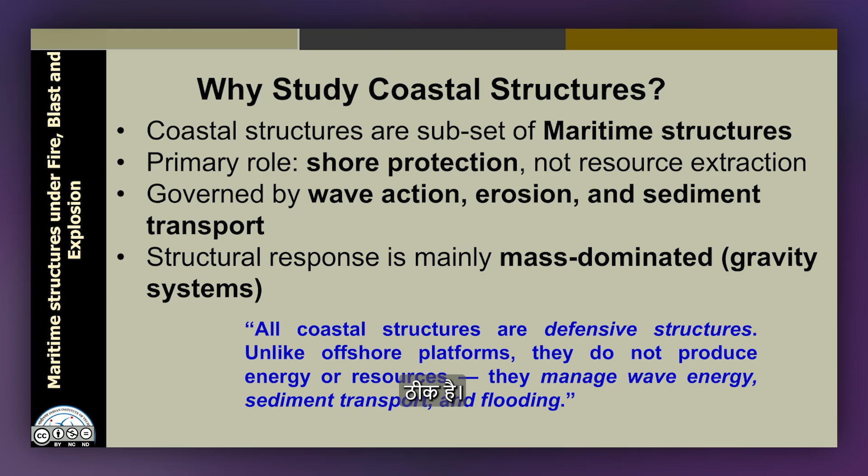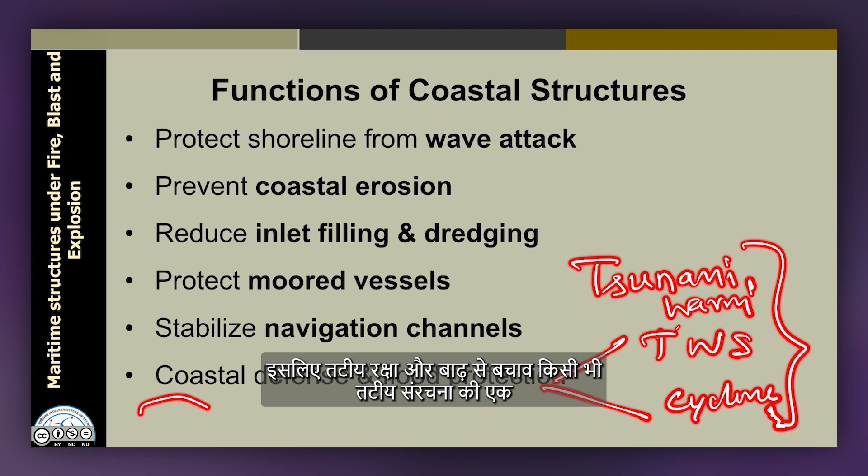Prediction of cyclones and other natural disasters are all part of coastal protection, because the most vulnerable area under these kinds of natural disasters is the coastline and people living along the coastal sector, the fishermen community, etc. So it becomes very important for a country to protect its citizens living along the coastline against these natural disasters. Coastal defense and flood protection becomes a very important and vital requirement of any coastal structure, which is of course controlled, governed and constituted by the Indian Coast Guards.

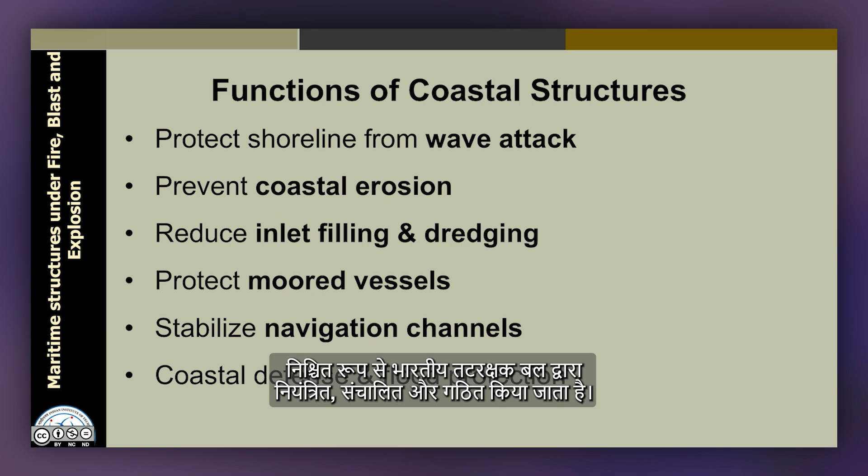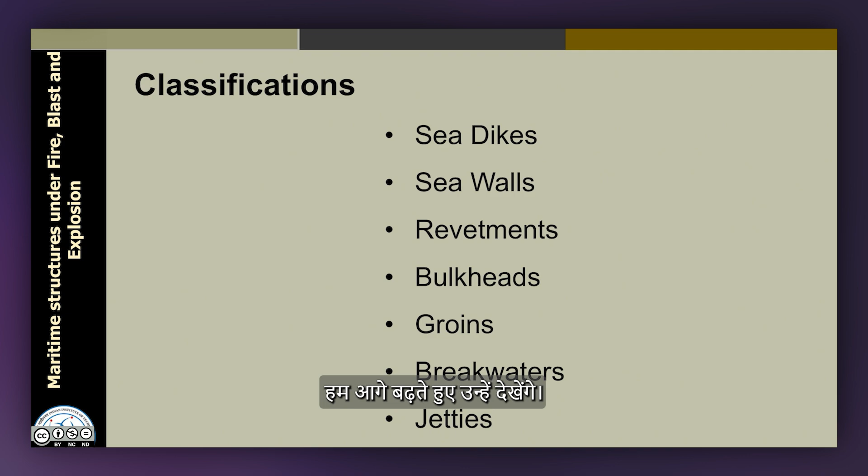Let us now look at the classifications of coastal structures: sea dikes, sea walls, revetments, bulkheads, groins, breakwaters, and jetties. These are the major classifications. There are sub-classifications within them which we will see as we go forward, but these are the major seven.

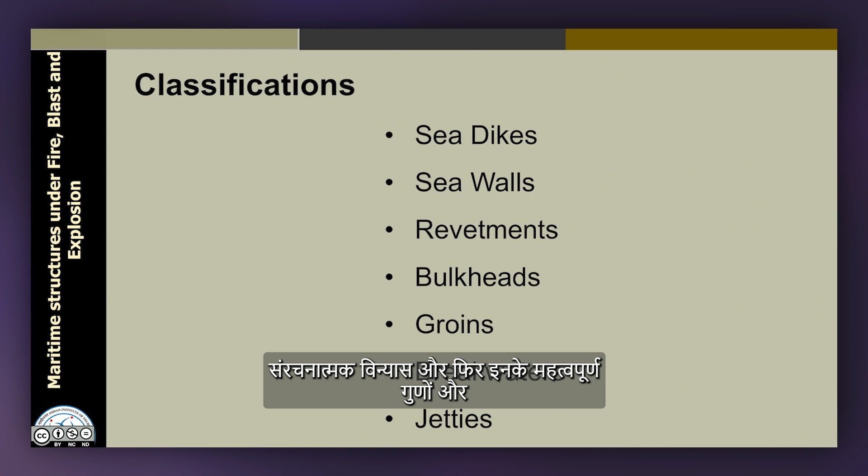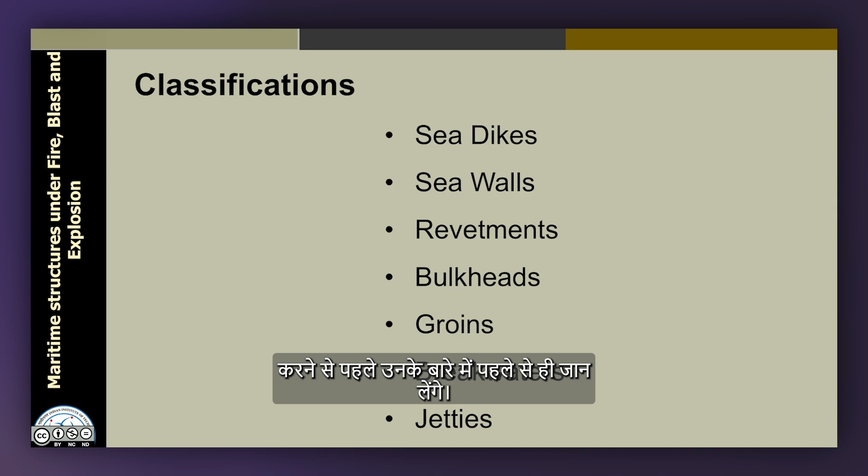Let us see one by one in detail to understand the structural geometry, material used for construction, the shape and size and cross section of the members, the structural configuration, and the merits and demerits of these, before we start designing them under fire, explosion and blast loads. Let us talk about sea dikes.

These sea dikes are very long, continuous coastal defense structures. A sea dike does not fight waves aggressively, it survives them passively. They do not protect the coast by fighting the waves; instead they act as a passive protection system. The typical geometry of a sea dike is a trapezoidal cross section.

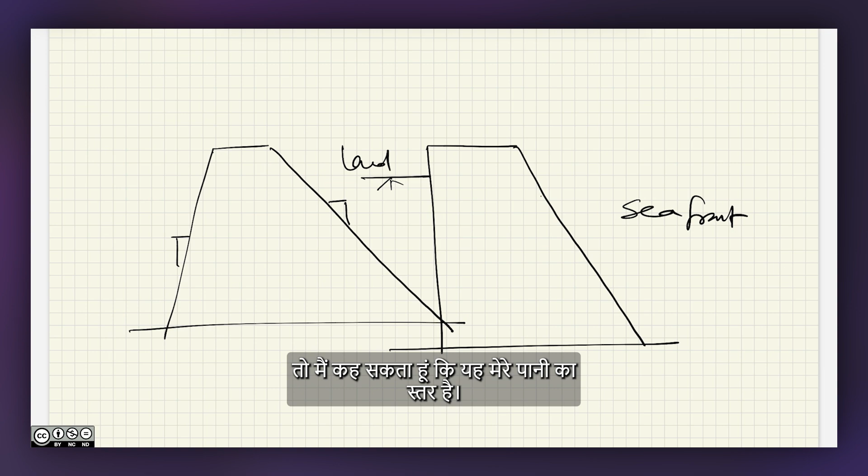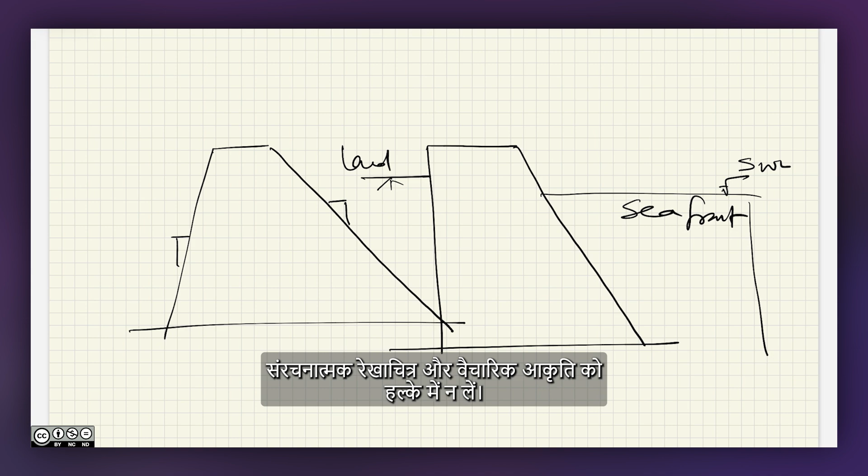So this is the water level, and there are minor details like weeping holes, toe and foot reinforcement, to make this structural system more stable against lateral loads. This is a conceptual figure, not a structural drawing. We call this a long continuous structure used for coastal protection against high waves.

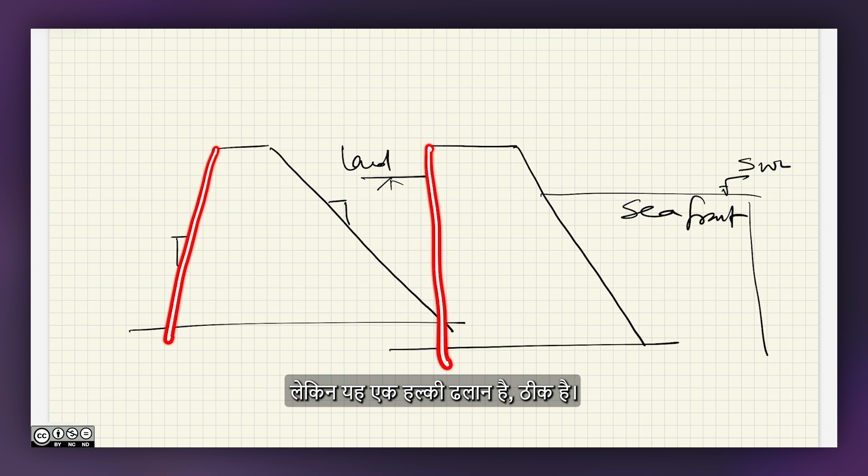So it has a trapezoidal cross section and is a massive gravity structure that rests on the seabed by its weight. The seaward slope is about 1 in 10 and the landward slope is 1 in 3 - the seaward slope is more gentle, and the landward slope is more steep, sometimes even vertical.

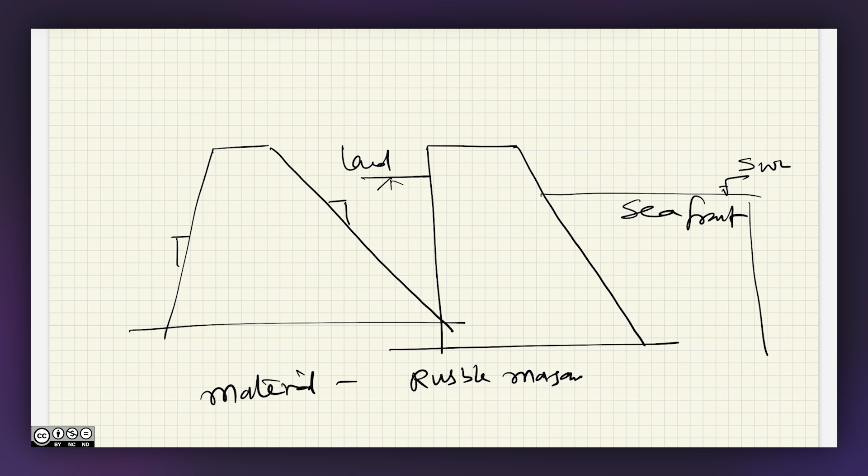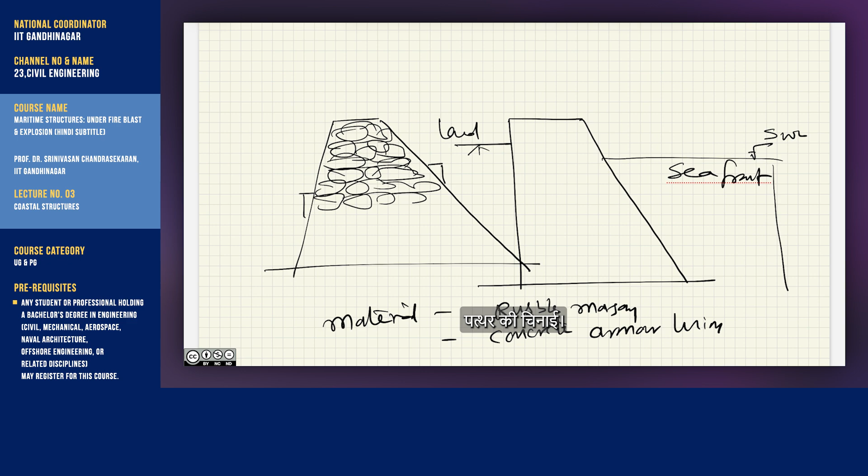So trapezoidal cross section, different slopes on either side, massive gravity structure. The moment I say gravity structure, you can believe the material used for construction is usually rubble masonry or stone masonry, sometimes with a concrete armor lining.

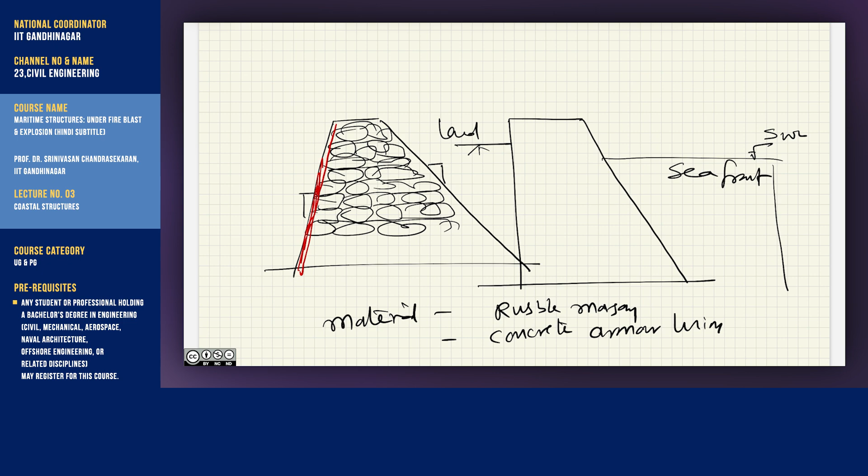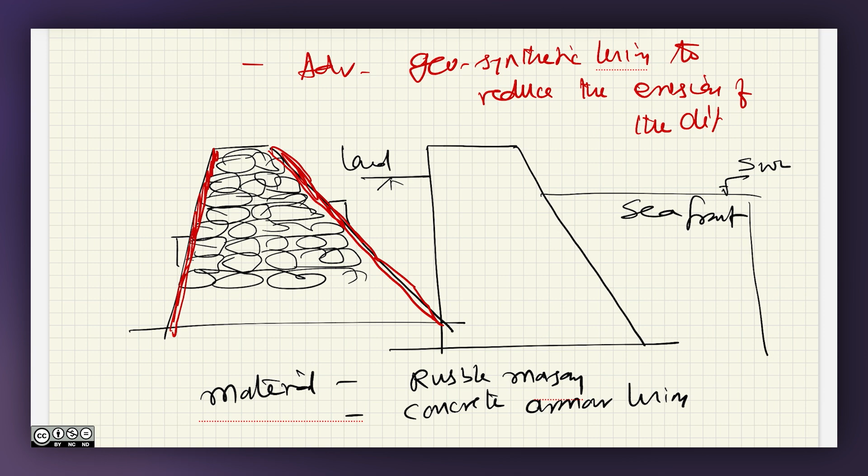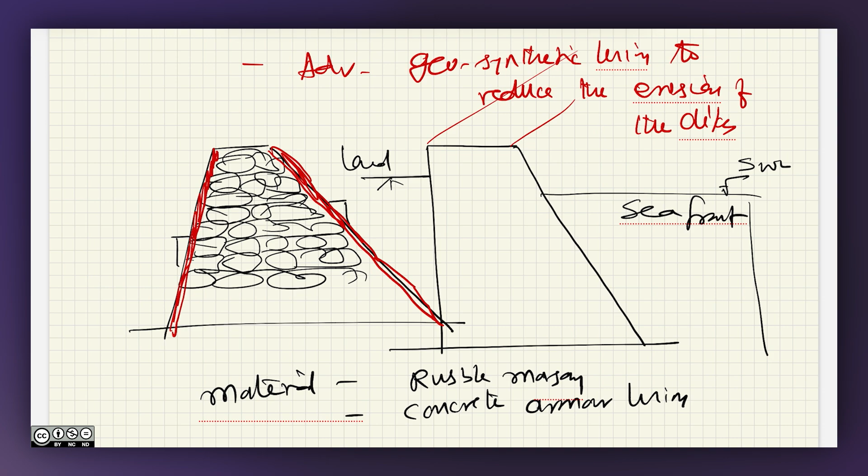The most advanced systems have geosynthetic liners to reduce the erosion content of the dikes. And on top, they often have a lot of vegetation to make it attractive, as well as to help reduce erosion on the top of these dikes.

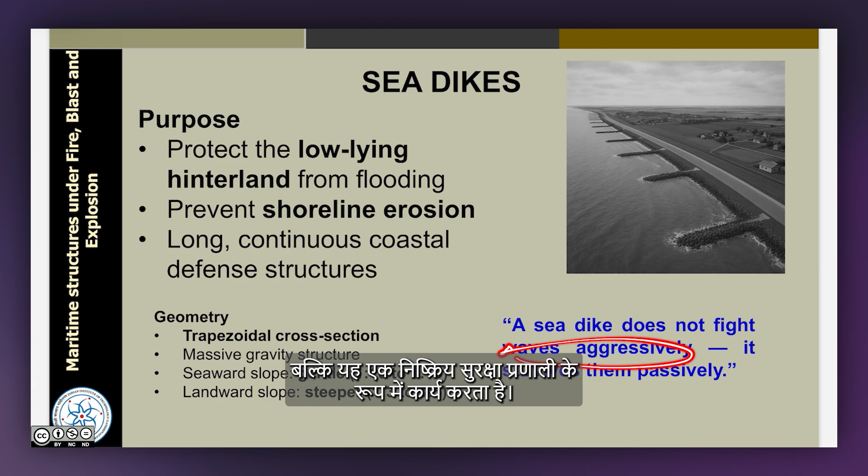So a trapezoidal cross section, different slopes on seaward and landward sides, massive gravity system - sea dike is a coastal protection system for defense purposes. It is not built to control waves aggressively, but acts as a passive protection system. A typical sea dike looks like this.

The material used is sand, silt, and clay. It has a protective layer of rubble masonry and boulders, asphalt and concrete slabs, and vegetation cover on top to reduce soil erosion. It also has filter layers to control seepage. Sea dikes are geotechnical structures, not pure structural systems.

Let us look at the structural action of a sea dike. It has very low permeability and water tightness. Wave energy acting on the sea dike is reduced by its gentle slope, and it has a huge mass. It fails in different modes: one is slope erosion, another is piping, and crest overtopping.

For example, if the sea waves increase, the dike can even be overtopped, which can cause failure. That is one way of failure.

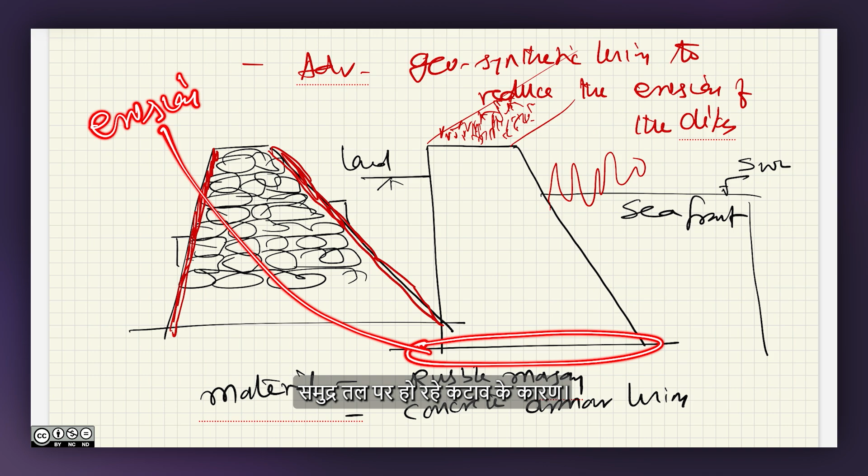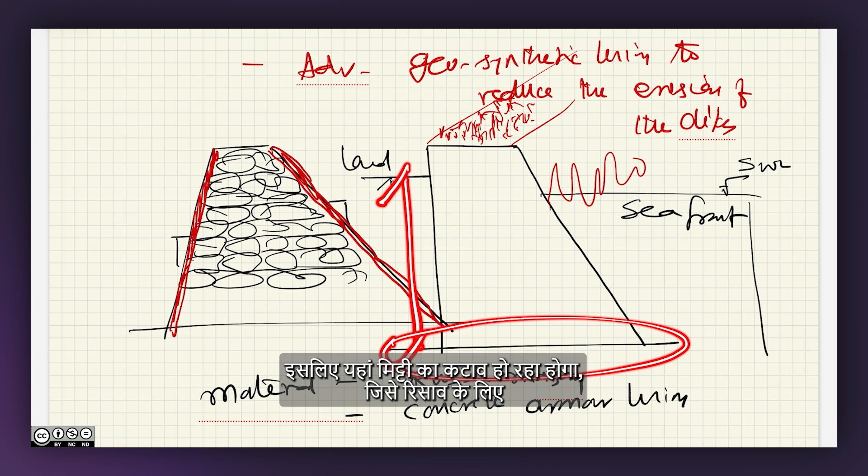A second failure mode can occur due to erosion happening at the seabed, since these are installed at shallow waters with depths of about 15-20 meters. Soil erosion can happen here, which needs to be protected by providing seepage holes and weep holes so water drains off and erosion does not take place.

If erosion takes place, it can also cause failure by differential settlement, which then induces cracks on the sea dikes.

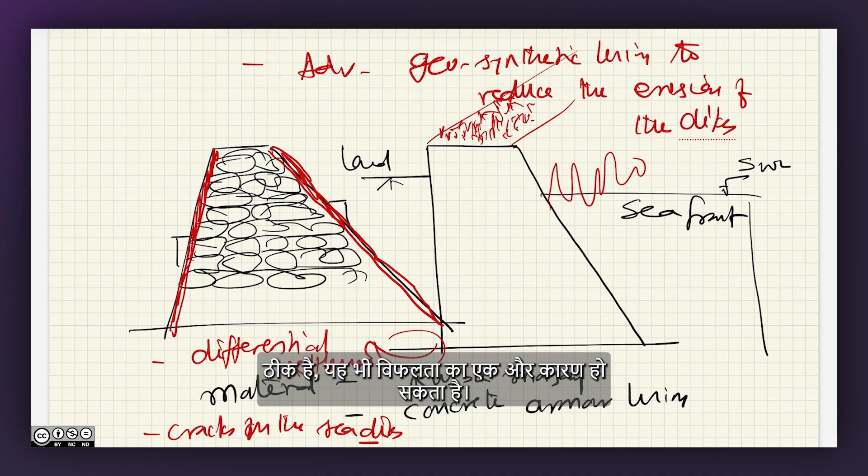That can be another mode of failure. So, the modes of failure could be slope erosion and crest overtopping. Let us ask a question: when is a sea dike not to be constructed?

As maritime engineers, tomorrow you will be advising coastal protection systems for the government and so on. Therefore, one should have an idea about where they are suitable, or a counter question, where they are not ideal.

Whenever you have very high initial cost involved, sea dikes are not ideal. They have visual impact and severe environmental impacts on the coast side, because they create a very rigid system which can affect the visual appearance of the coastline. Coastlines are becoming an important sector for tourism attraction, so if you have a sea dike, people feel this is a place of overtopping or flooding, and it will not attract tourism.

Tourism wants a very gentle, land-based beach surface, smooth and mixed with water. Natural beaches in Hawaii, Thailand, etc., look like the beach mixes fluently with the water body. Capri Island in Italy has natural, scenic beauty that attracts many foreigners and tourists. When you construct a sea dike, a rigid mass system along the coastline for a longer length, it has a very serious visual impact.

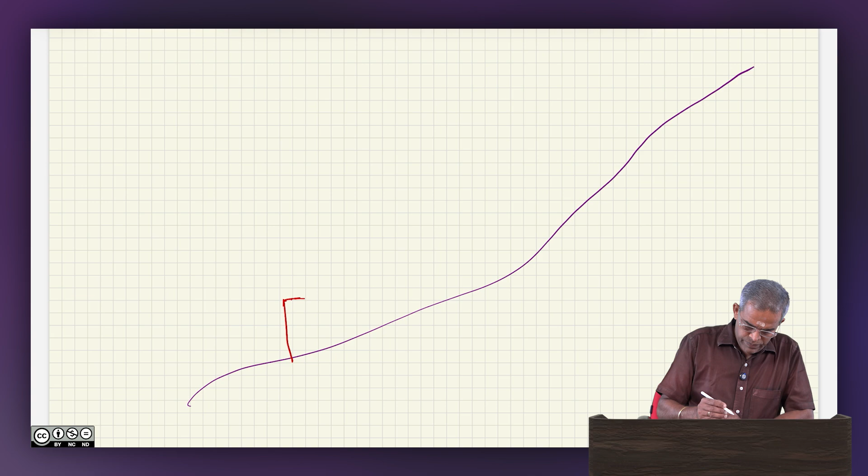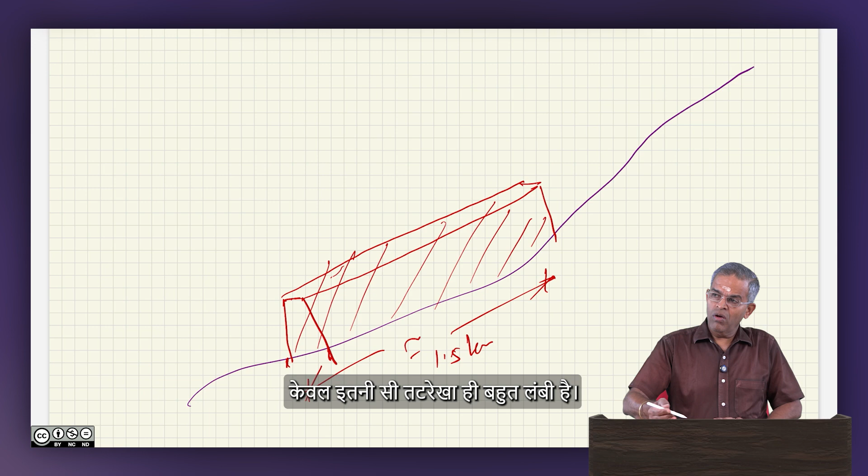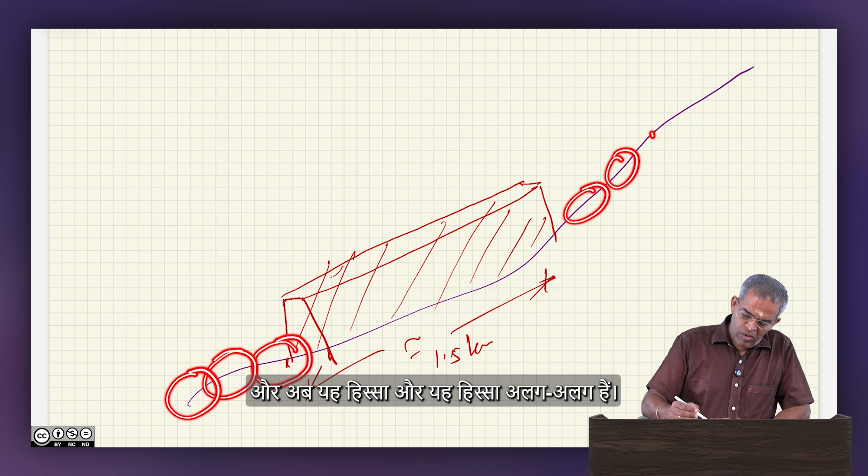Let us say we have a coastline and you construct sea dikes here, founded for a certain length only, maybe about 1.5 kilometers, because it is a very expensive system. The coastline is very long and continuous, so now the erosion at this part and this part becomes different, and there will be sediment transport happening between these two sectors.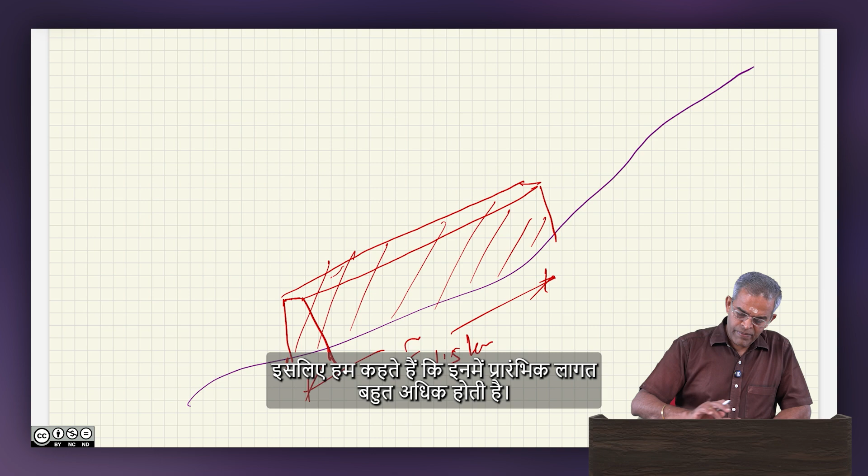So, if you construct a sea dike at this region, the rest of the coastline will be seriously affected—that is the trouble. Effectively you must construct a sea dike for the entire length of the coast, which is highly uneconomical. They involve a lot of initial cost, create very severe visual impact, require continuous maintenance, and most importantly, they cut off access to the coast, because being a rigid system, it obstructs the land or beach from the sea.

So, it cuts off the access. Sea dikes protect land, but at the cost of losing the coast. You lose the coastal scenic beauty when you construct a sea dike. Of course, it protects the land, no doubt about it. So, they are constructed judiciously, only when really required.

They are not casual systems to be constructed wherever and whenever you want, just because you want to invest in coastal protection. But if you have a nuclear reactor on the coastal side, or some important research laboratory there, you need to protect them—for that sector, you construct a sea dike.

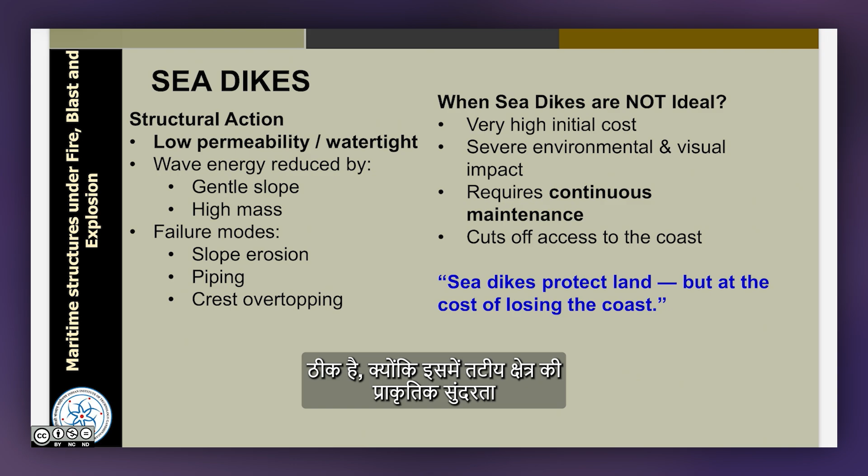For example, in Japan, the nuclear reactor located along the coast has a sea dike as a protection structure. In Kudankulam, Tamil Nadu, a proposal is also coming up to construct a sea dike to protect such structural systems. So, sea dikes are very strong, massive, rigid protection systems constructed on the coastline for a specific purpose, because of their visual impact and issues related to the scenic beauty of the coast. It is not a very common system to be constructed.

The next one is the sea wall. It is more or less similar to sea dikes—you can see a sea wall. It is a rigid wall with a tapered cross section, and it protects the coastline from even very high tides, and partly people also propose constructing sea walls for tsunami protection. Sea walls are massive structures.

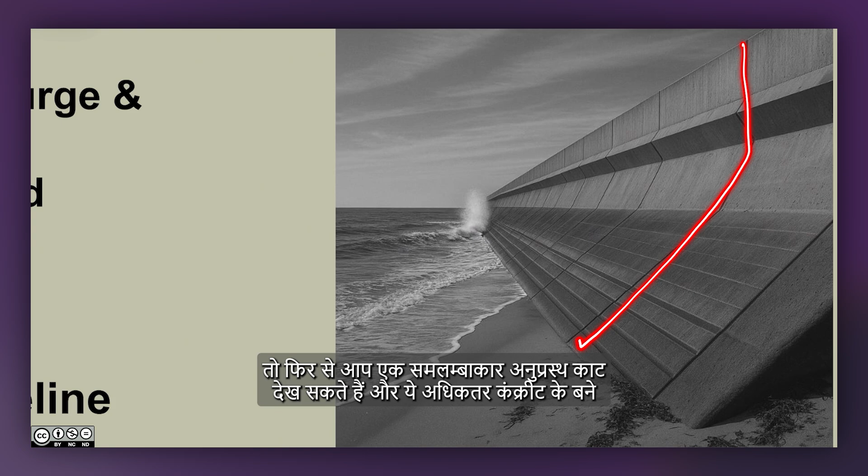So, we can now look at the structural system—again a trapezoidal cross section, and mostly they are made of concrete, because rubble masonry cannot have an integrated structural system like this. So, they are mostly of concrete or prefabricated interlocking blocks, essentially concrete interlocking blocks, otherwise called armored blocks.

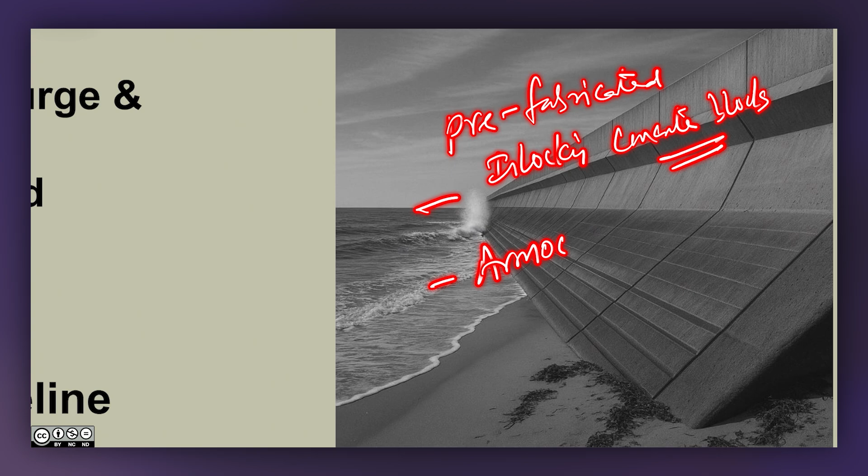Sea walls are generally constructed to prevent flooding due to storm surge and waves. There are sectors on the coastline where flooding and coastal erosion very often take place. For example, in Odisha coast we have this trouble, with a lot of coastal erosion happening. Similarly, in Kerala coast we have this trouble of coastal erosion. These places of severe coastal erosion are identified using coastal vulnerability mapping, and this length of coast is chosen where no other alternative can work. Sea walls are recommended there. They are very expensive systems, friends, they are very expensive.

If you look at the Thailand coastline, near the scenic beauty of Sriracha campus or Sriracha land and so on, you have got white sand beach in Thailand, where some sectors of this coastline are protected by sea walls, because you have the Thai oil company whose plant is located on the coastline. So to protect the refinery unit of Thai oil, people have constructed sea walls for not a longer length, just a small length. They are essentially constructed to prevent flooding.

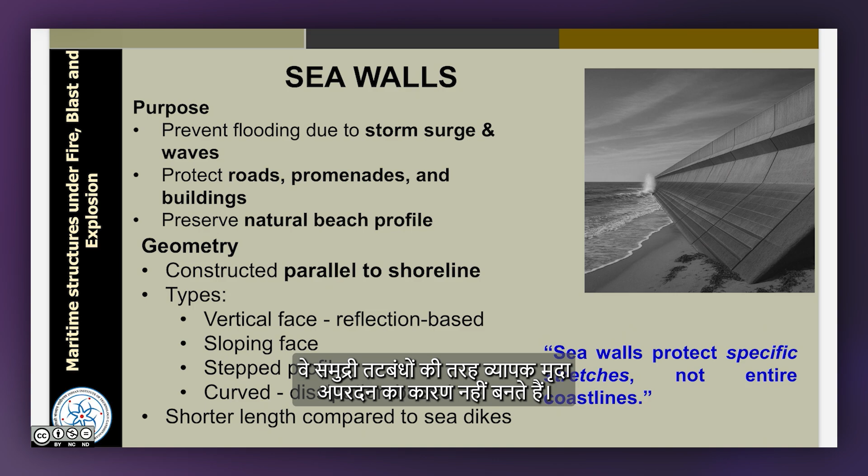It is a coastal protection system. It protects the roads, promenades and buildings built along the coastline for a certain length, while they also preserve the natural beach profile. They do not cause extensive soil erosion like sea dikes. Sea walls also help us protect and preserve the natural beach profile.

They are generally constructed parallel to the shoreline. There are different types of sea walls you can construct: a vertical face, which is called a reflection-based sea wall, a sloping face, stepped profile, and a curved profile, depending upon the architectural aesthetics required along the coastline. Sea walls protect specific stretches, not the entire coastline. They are constructed only for a short stretch, because they are a very expensive system.

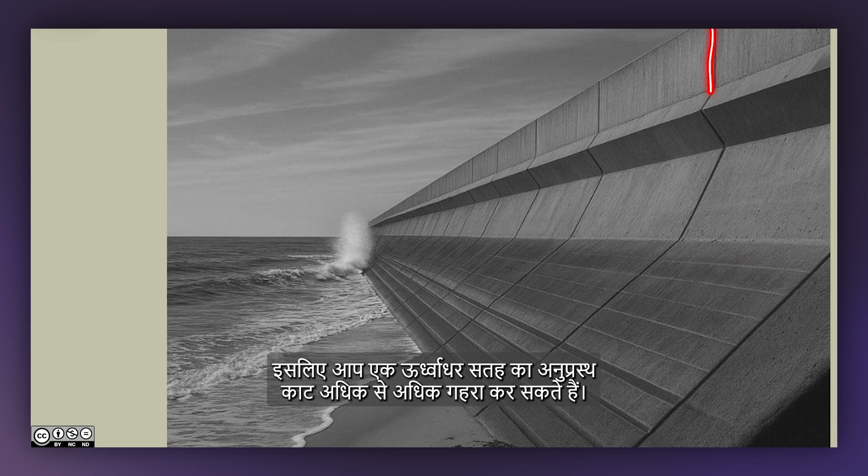Rubble masonry is used, whereas the outer line is constructed with concrete. You can also have mass concrete vertical walls or asphalt concrete surfacing walls for improved visibility. The one shown here is an asphalt concrete surfacing wall with a lot of weep holes. Water is allowed to pass through them and drain off the other side. So you can have a vertical surface, or a tapered cross section, like this section here.

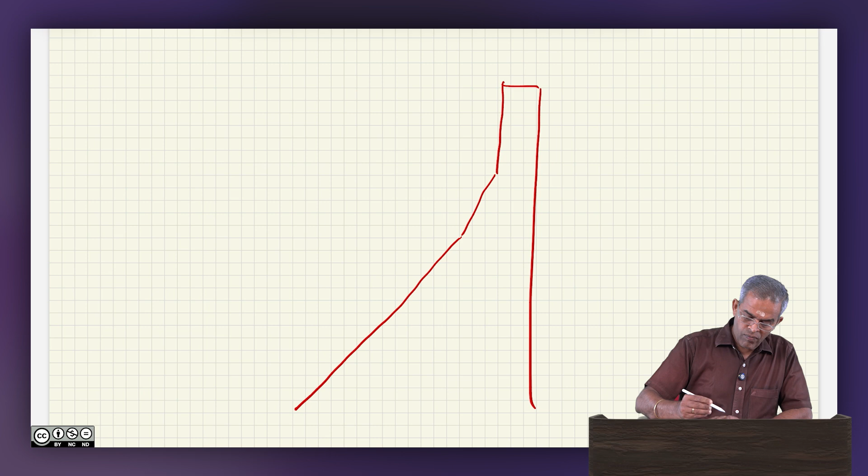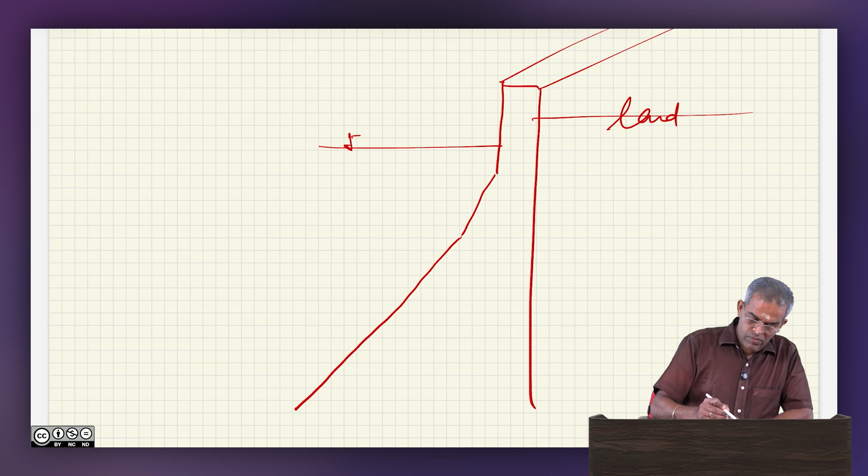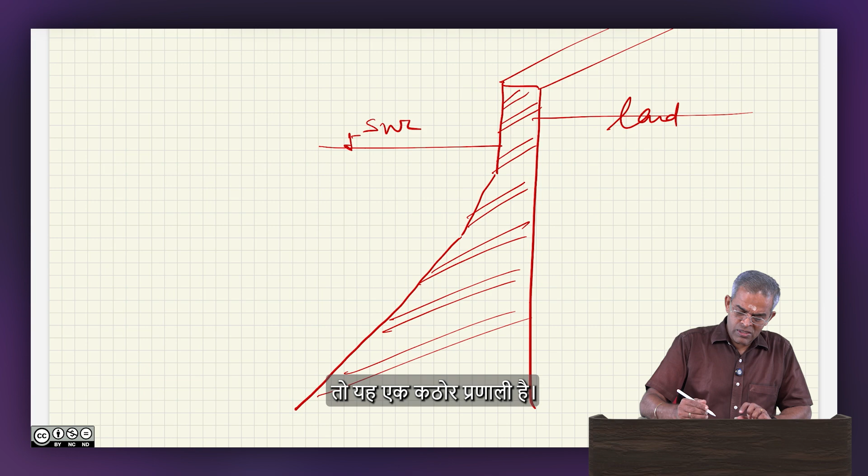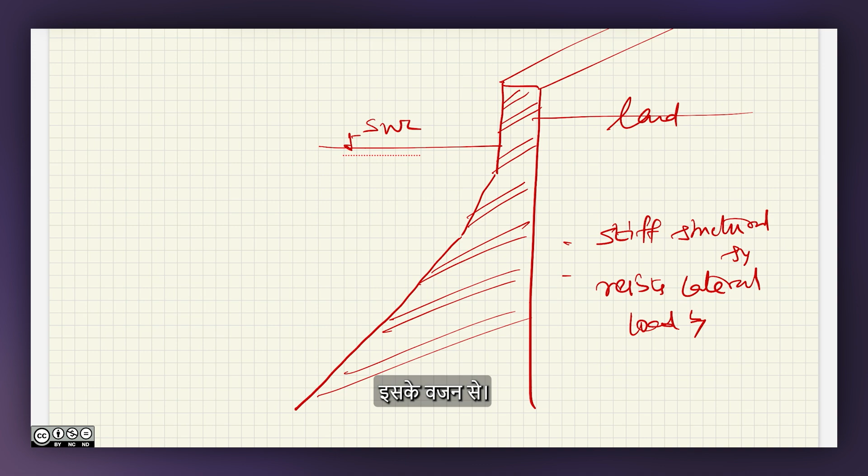So this is the land side, and this is the sea wall. You can have a vertical surface for a shorter length, and this is a cross section. It can be masonry, armored concrete, armored blocks, or concrete solid walls. This is a stiff system. It resists lateral loads by its weight and stiffness, so it is a rigid system.

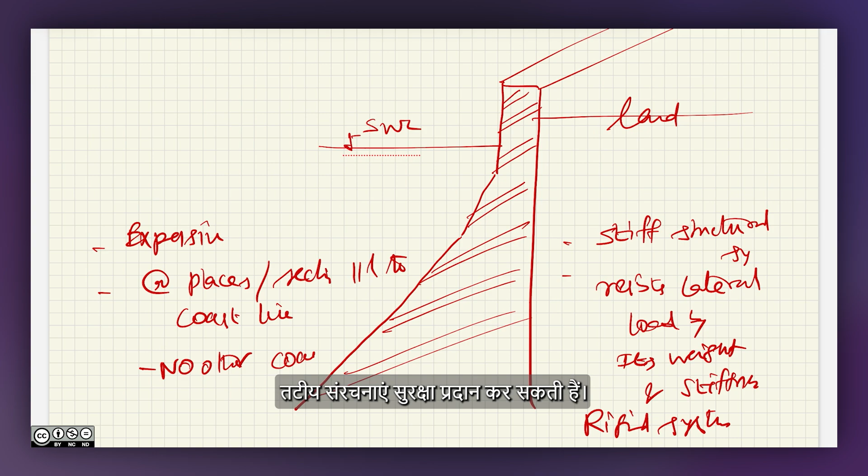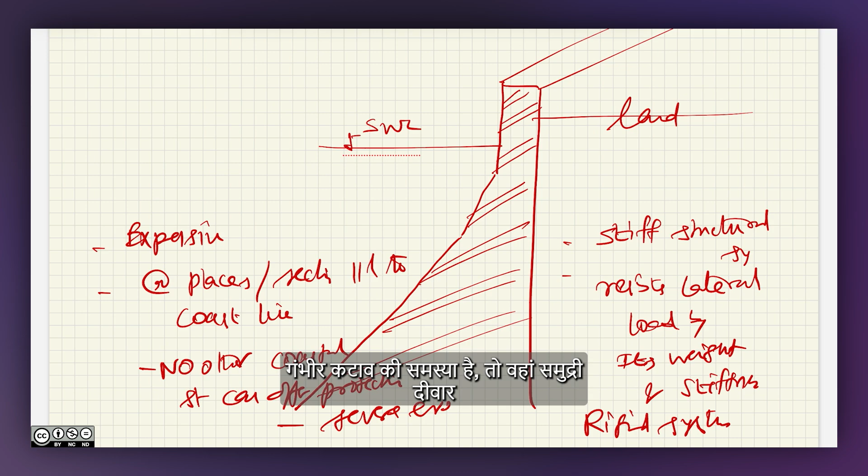They are very expensive, so they are only constructed at places or sections parallel to the coastline where no other coastal structure can offer protection. For example, if you find a coastal line which has a severe erosion problem, then one can go for sea wall type construction.

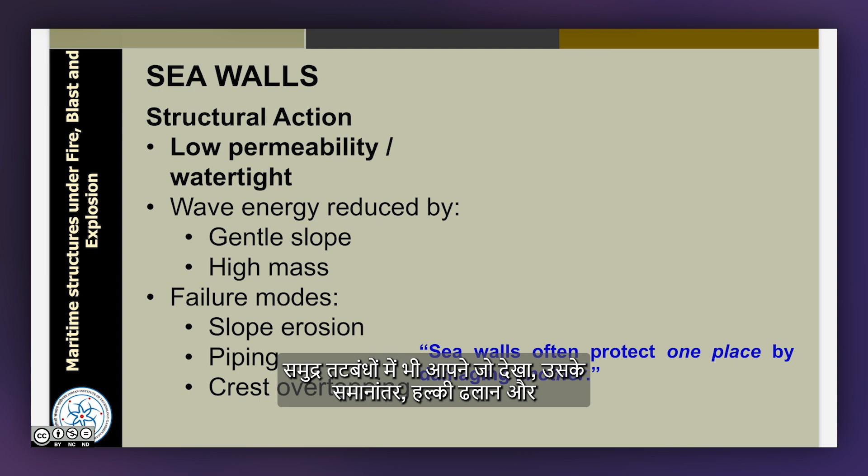The structural action of sea walls shows low permeability and water tightness. They have wave energy reduction taking place because of the gentle slope and high mass, parallel to what we saw in sea dikes. The failure modes are the same as those of sea dikes. Sea walls often protect one place by damaging the rest — they protect one spot where they are constructed, but the rest is severely damaged.

The construction type can be sloping front or vertical front, and the stability of the wall depends on toe protection. There are many examples where sea walls have failed, one classical example being the failure of the Kamaishi sea wall in the 2011 tsunami in Japan. Sea walls also have typical hydrological problems: they increase the mean water level at that sector and increase wave heights, as per the report provided by IPCC in 1997.

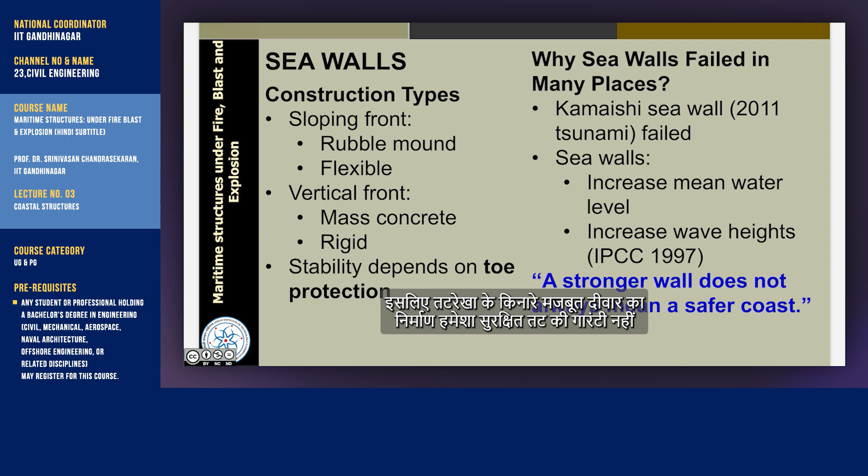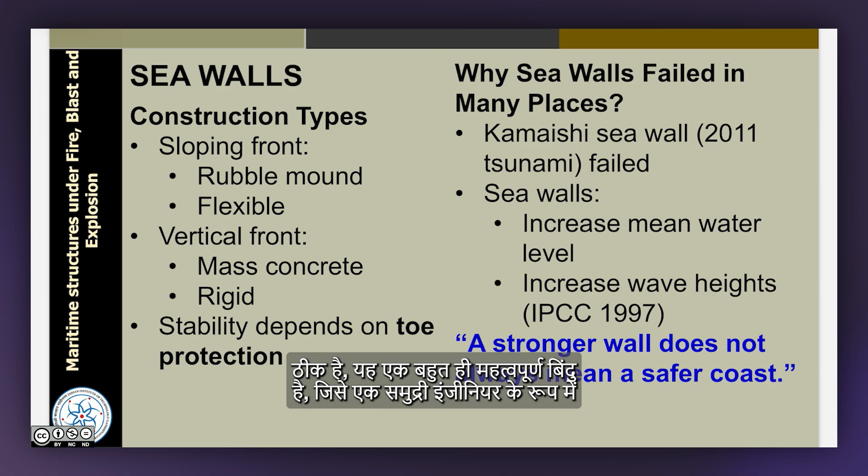So a stronger wall constructed along the coastline does not always mean a safer coast. A stronger wall for that segment will protect the coastline there, but the rest of the coastline may get affected very severely. That is a very important point which, as a maritime engineer, we must register in our mind.

Let us see the different failure mechanisms by which sea walls and sea dikes, which are rigid structures, can fail. One is overtopping and scouring, one of the most common causes of failure. When water waves higher than the wall flow over it, they create a high speed water jet on the landward side. This current scours and erodes the soil at the base, causing the wall to destabilize, and the wall will overtop or collapse.

It can also fail by hydrostatic pressure. When the water level rises gradually, it causes flooding by building high hydrostatic pressure at the heel. When this exceeds the structural limits of the design, it fails.

The third one can be settlement. As I said, erosion will cause settlement of structures, so subsidence or settlement can also cause sea walls to fail. Under massive earthquakes of 9.0 magnitude and above, such as occurred in Japan in 2011 during the tsunami, ground level subsides by about 1 meter. This lowers the protective height of the wall, causing functional failure. When the wall gets lower, the wave overtops it and the wall itself is completely washed away by the sea waves — that happened actually in the 2011 tsunami in Japan.

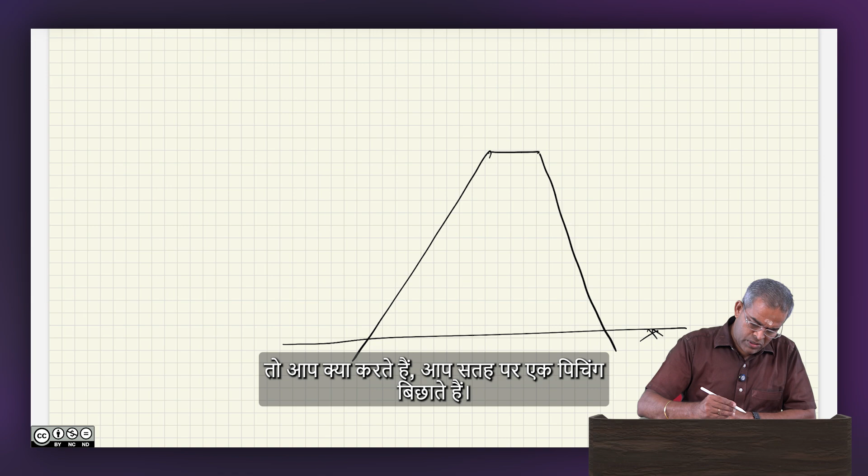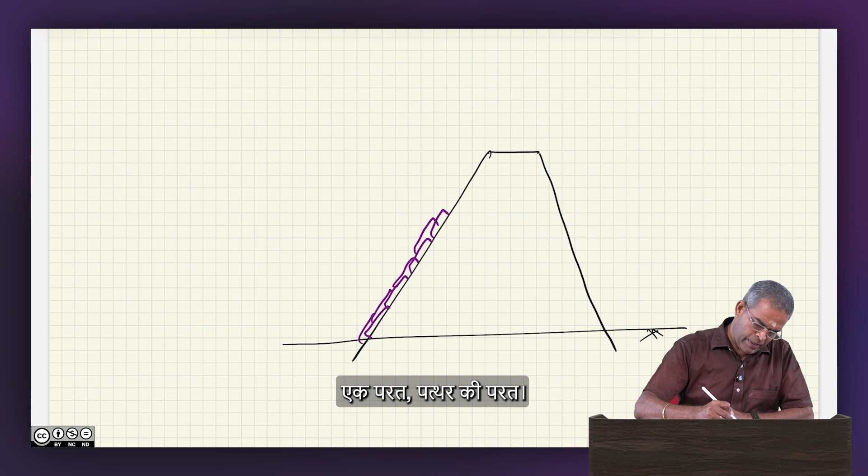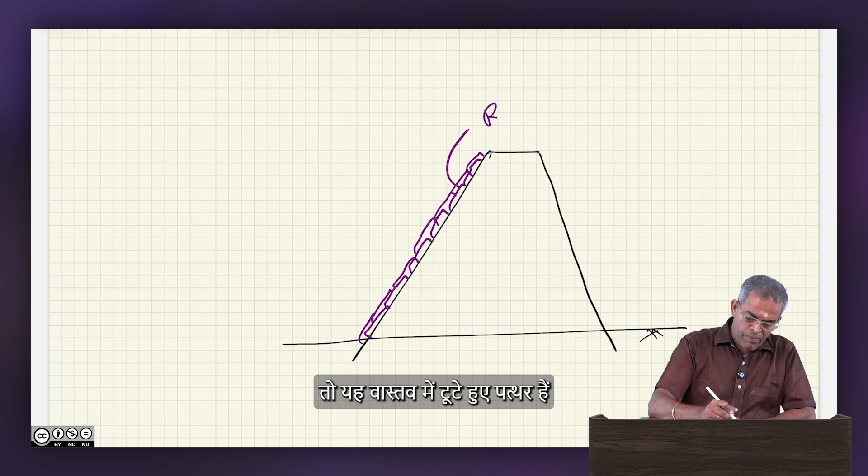So what you do is put a pitching on the surface - a stone lining. You must have seen this on most hill roads, where people protect the ghat roads using pitching. This is actually rubble stone pitching, and its purpose is to prevent or at least reduce soil erosion.

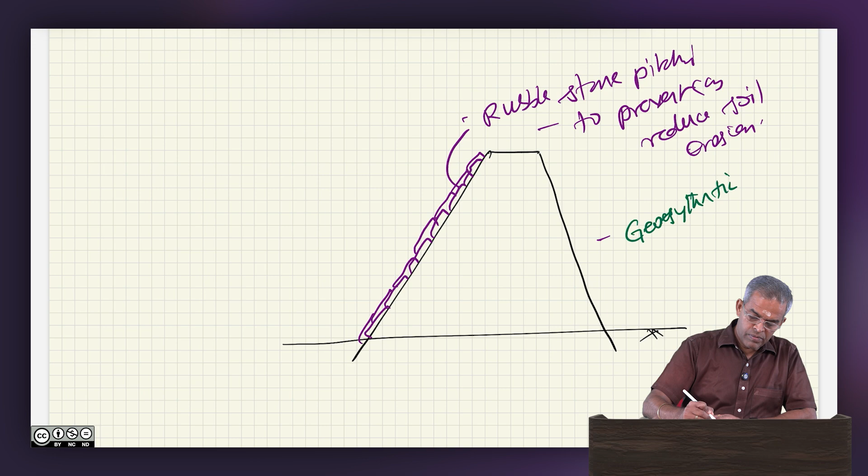An alternative is that people have started using geosynthetic fibers, or reinforcing them with geosynthetic fibers, so that slope stability is achieved.

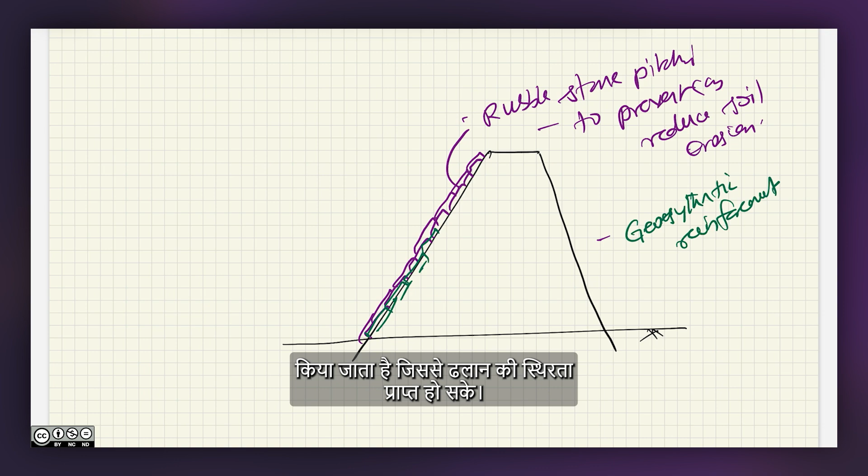The purpose of a revetment is again shoreline protection from soil erosion. It maintains the natural beach slope. You will see this along most of the beautiful scenic coastlines of Italy, like Naples or Capri, where you'll find revetments constructed along the entire length of the beach to maintain its natural scenic beauty.

Revetments are a flexible alternative to sea walls. Sea walls are more rigid, whereas revetments are very flexible. They have a sloping profile and a layered system: armor layer, filter layer, and core soil.

Revetments are actually energy absorbers, not reflectors - they do not reflect energy, they absorb it. If sea walls fight waves, revetments hug the waves. This is the key functional difference between a revetment and a sea wall or sea dike: sea walls reflect and fight waves, whereas revetments hug and absorb the waves.

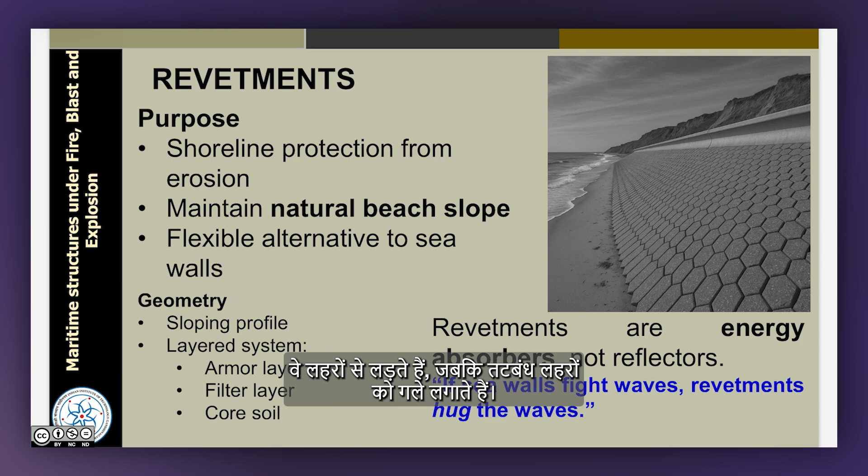The common materials used for revetments are armored stones, concrete blocks, geotextiles or geosynthetics, and vegetation in the top layer to prevent soil erosion. You must have seen this common practice on ghat roads along hill stations, and even where houses are built on sloping terrains - people construct revetments for this purpose.

So revetment is not only an important system for coastal protection - its system also helps stop or control landslides and improve ground slope stability. These structures maintain, strengthen, or stabilize the slope of natural ground, and they are also constructed on coastlines to reduce coastal erosion.

The structural action of revetments is very simple: they dissipate wave energy through porosity, allowing water to pass through and absorbing it. Through porosity they dissipate high-end waves, control surface runoff, and reduce reflection compared to sea walls.

Revetments have a very short service life, about 25-30 years, after which they disintegrate and break into pieces. Revetments are preferred when there is low cost investment and on a semi-urban or rural coast where one can think of temporary solutions.

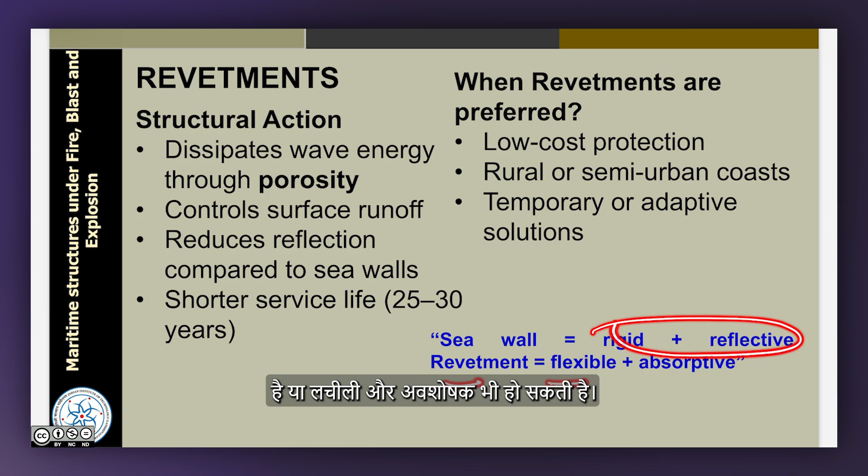Sea walls are rigid and reflective, revetments are flexible and absorptive - they absorb waves while sea walls reflect them. Sea walls are constructed with concrete or armored stone blocks, while revetments are rubble masonry lines with geosynthetic fibers or layers. The service life of revetments is about 25 years, whereas sea walls can sustain 75 to 80 years as a long term investment.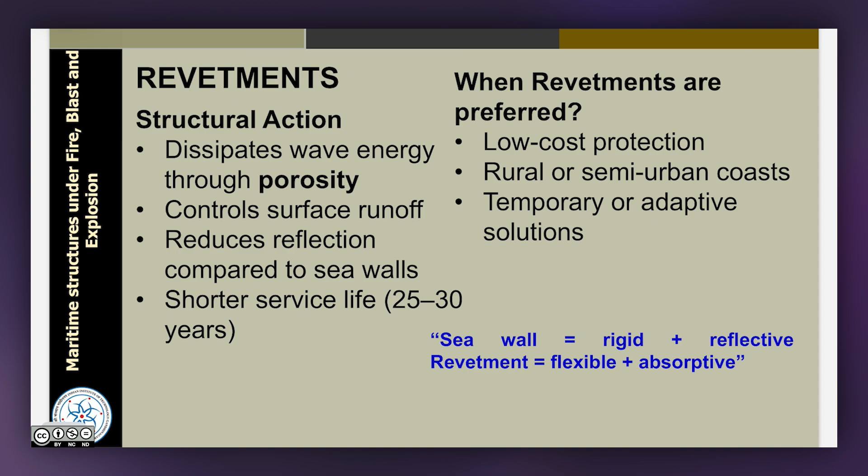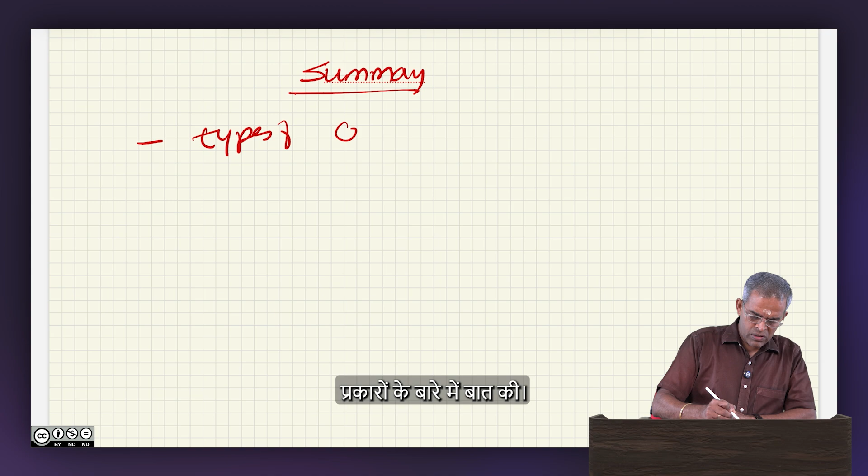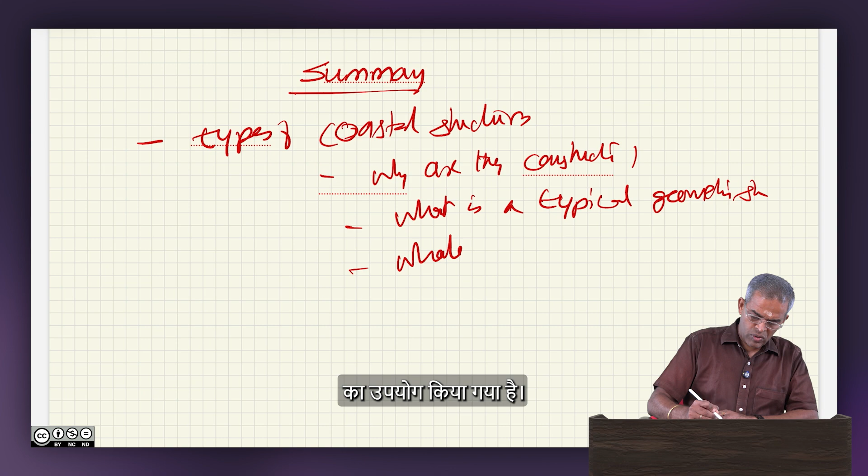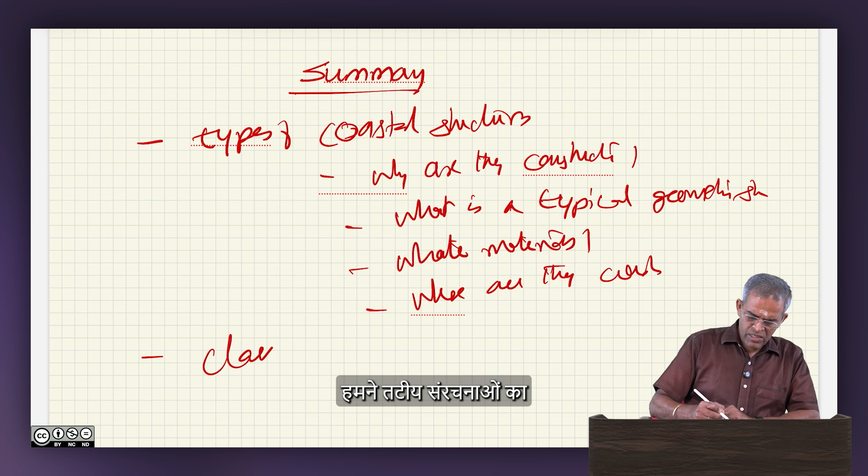So friends, let us look at the summary. We talked about different types of coastal structures, why they are constructed, their typical geometric shape, what materials are used to construct them, and where they are constructed. We also saw classifications of coastal structures - there were 7 of them. We discussed in detail sea dikes, sea walls and revetments.

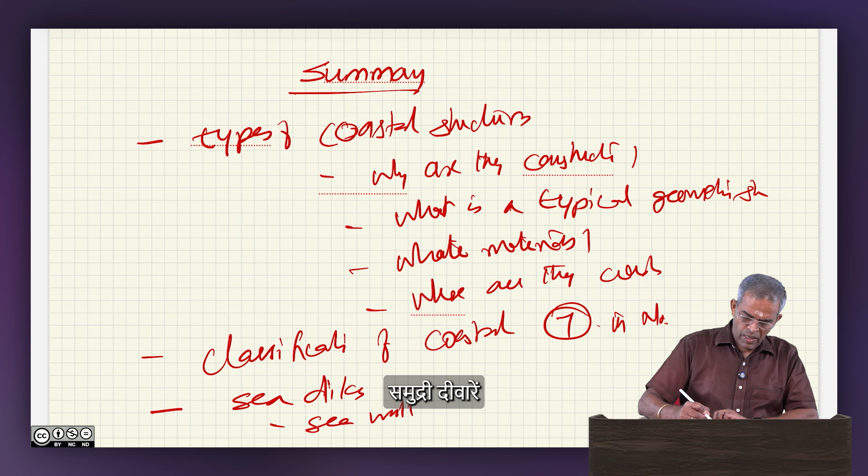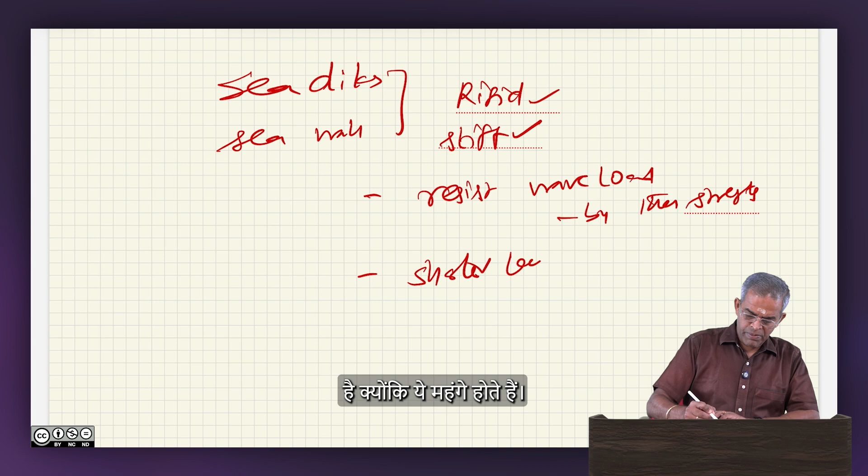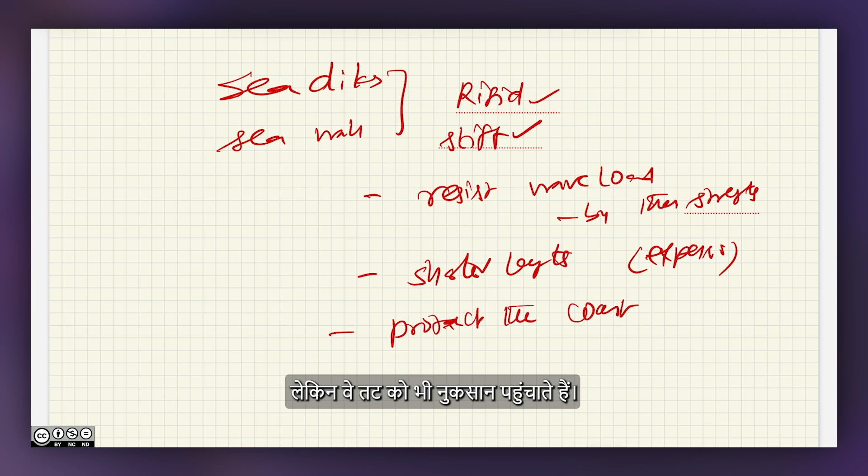We understood that sea dikes and sea walls are rigid systems, designed to remain stiff. They resist wave loads or lateral loads by their strength. They are constructed for shorter lengths because they are expensive. They protect the coast, but they also damage the rest of the coast.

Whereas revetments are flexible systems. They are also constructed to protect the shoreline. They absorb waves, whereas sea walls reflect waves. The lifespan of revetments is approximately 25 years. The material used for construction is essentially coarse rubble masonry, and one can also have armor block lining and geosynthetic reinforcements.

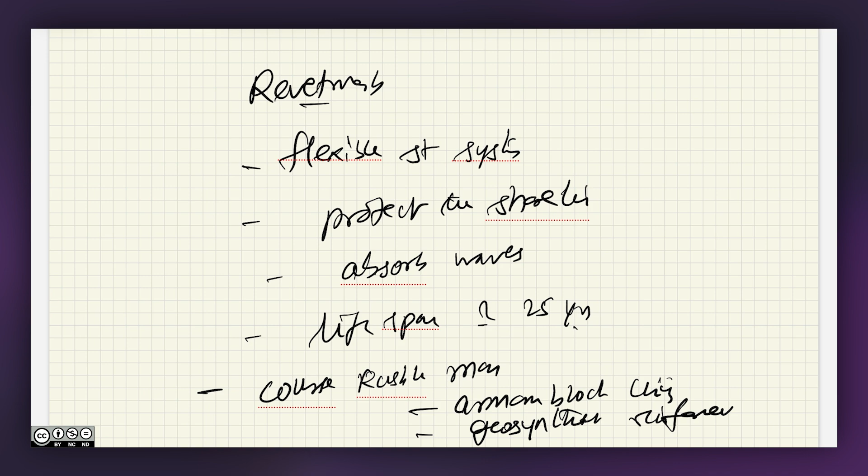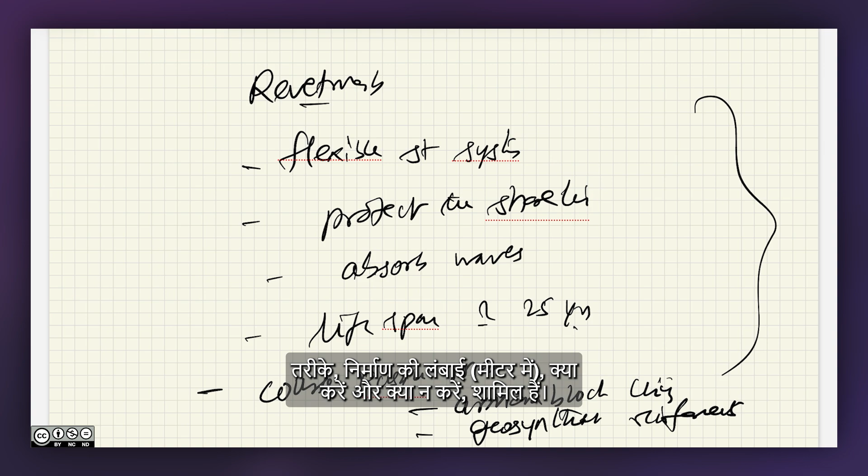So friends, in this lecture we started learning about coastal structures, their geometric shape and size, structural action, modes of failure, methods of construction, and do's and don'ts of at least 3 types of structures: sea walls, sea dikes and revetments. Follow the next sequel of the lecture to know more about the remaining types and classifications. Thank you very much. Namaste.